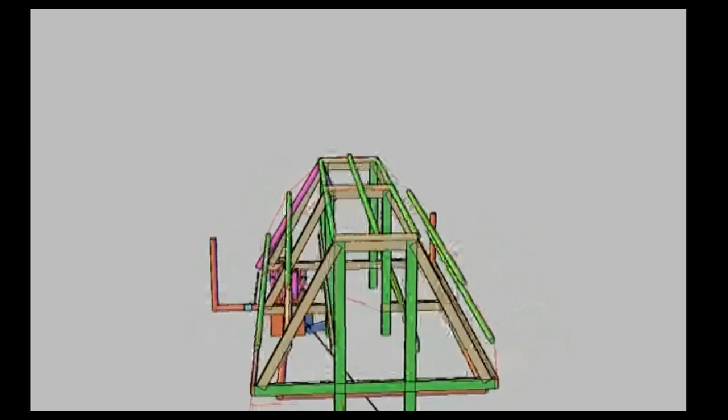The reason I doubled it right off the bat was because I got reading up on greenhouses, and everybody said if you think you need a greenhouse of a certain size, double that. And they were right. I would have quadrupled it or even more had I known how fast things were going to grow and how much more space I would actually want.

But I should mention, I did build this greenhouse strictly as a test greenhouse. I did not expect this to last more than a couple of years. It's lasted 6 so far, which is awesome. And the frame is still pretty solid. It does need to be re-plasticked at some point. We're overdue for changing the plastic.

I do have some glass. I thought about putting glass in it. I don't know. I don't own the land here, so I don't want to get too involved or do something that upsets the landlords. So for now, it is what it is. It still works great, even despite how opaque and how little light is coming through the plastic at this point. It still does a pretty good job.

So like I said, I was going to do a video on this, but the more I got thinking about this and pondering greenhouses and all the logistics of it, I decided I'm going to do a series on greenhouses and setting up your own greenhouse, because I don't want to turn this into a 4-hour video. So I'm going to do this in a series. Today we'll start with some of the basics about greenhouses.

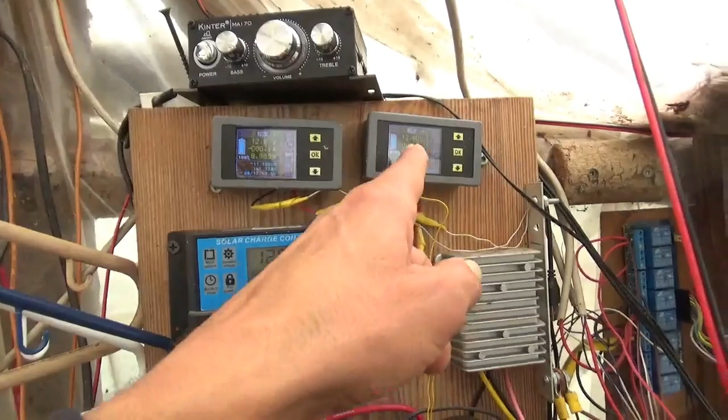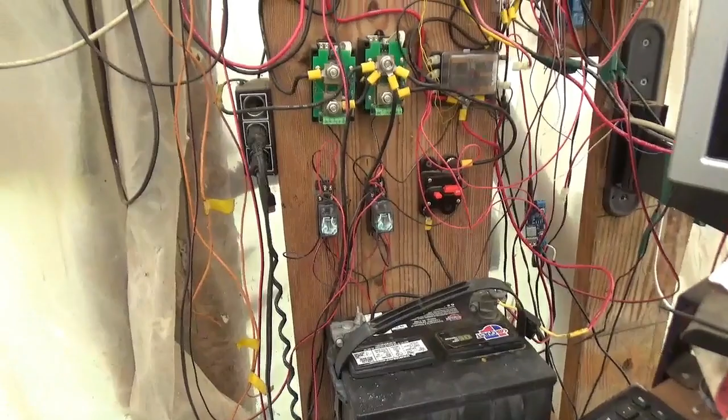I guess real quick I'll just show, even though it's a cloudy day, all the power for the Raspberry Pi is coming from the solar panel, and we're actually charging that battery bank. We were down at 12.2 volts last night, actually 12.15 when I walked out of here, and now we're sitting back at 12.6. So that's nice to see this battery's taking a charge, and it's nice to be back on the solar power.

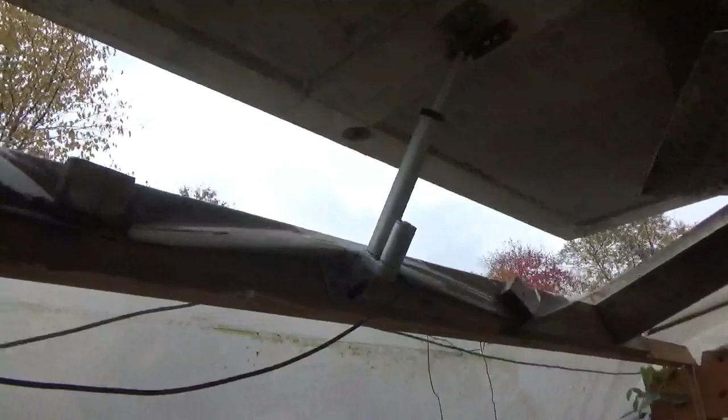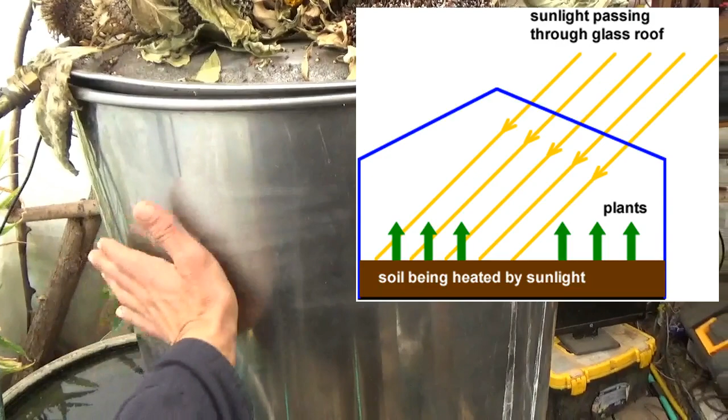So I don't have the sensors fixed yet on the Raspberry Pi, but we do have the DC power system back, and so the vents open and close now. I just sent the command to open these vents because it's pretty warm in here. It's a cloudy day, but you'd be surprised how much heat you can actually collect even on a cloudy day, especially when you accumulate that in combination with all the thermal mass that you've created overnight. This pot is probably 120 degrees, maybe 125. It's pretty warm. So that brings me to my next point.

Greenhouses effectively are trying to mimic a natural environment, and in trying to mimic that natural environment, you're trying to provide plant comfort. That's really the end goal for a greenhouse, is to provide comfort for plants. And I think that's a perspective that you should adopt for anything you're growing. And it's a huge part of regenerative agriculture, providing adequate mineral nutrition and biology and comfort for plants. When you can put a plant in its optimal environment, it can express its genetics at an optimal rate, and that will give you optimal yield.

So what we're trying to do in a greenhouse is mimic an environment that is where the plants that we're growing come from. So in the example of ginger, this is all ginger here. Ginger is a tropical plant. There are non-tropical versions of ginger, but this is a tropical version of ginger, and so it grows in the under canopy of rainforest in its natural environment. So what we're trying to mimic is the under canopy of rainforest. So that said, in order to do that, you'd want high humidity, you'd want warm temperatures, and you'd want good soil moisture and good humic matter.

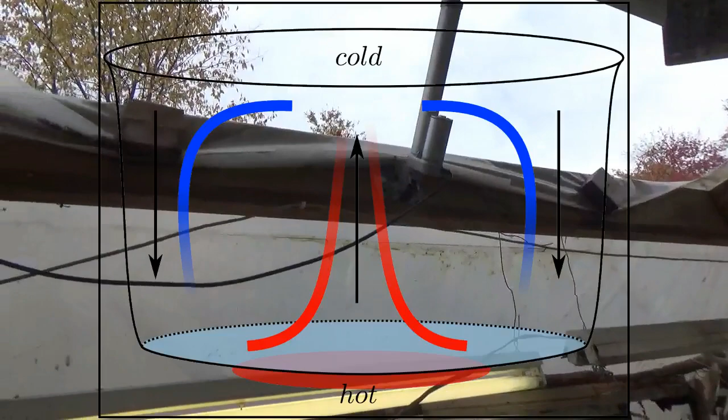You can use that to your advantage, or you can work against it. I like to use natural systems to my advantage, and so I take full advantage of convection. That's that process, convection, and so I let the heat out with that. And then when we get above 50, if it's still too hot in here and the temperature reaches 85 or 90, I forget what the set point is, that's when we open the secondary vent and start really piping air through here. Now I don't need a fan to move air through here.

These vents, you'll notice how big the space is for these vents. Each of these vents I think is 3 foot by 7 foot, so 21 square foot of ventilation space. The greenhouse floor space in here is 288 square feet as a comparison. So you can see what that percentage is, and that's very critical. You need to be able to exchange a tremendous amount of air very quickly when you need to exchange air. So let's see, go on to the next point.

Okay, so we talked about venting, we talked about plastic type. One of the other advantages to the greenhouse plastic is it has that infrared coating that's supposed to help reduce dew and condensation. So this is another thing that you have to manage in a greenhouse environment, is humidity. And it's really, really important, again, for plant comfort and health. Ideally, humidity levels would be in the 50 to 60% range, could be as high as 70%.

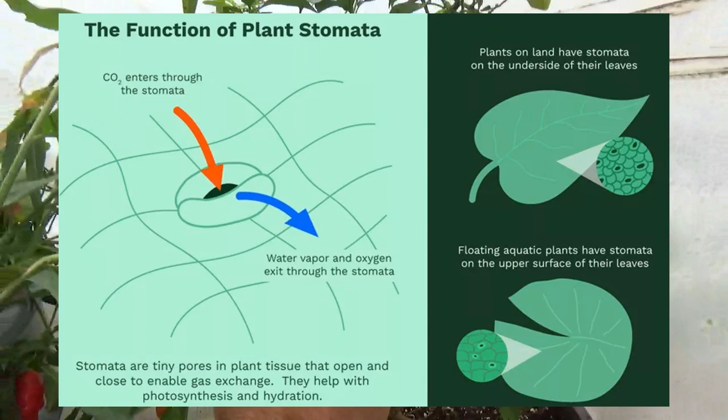If it gets much below or much above that, plants have a really hard time opening their stomata and doing transpiration. And that's a huge part of a plant's growth. It needs to be able to pull moisture up from the soil into the stem, through the leaf, photosynthesize, and release that excess moisture through the stomata. For those who don't know, the stomata are these little holes in each plant leaf, and if you look at these on a microscopic level, they have little breathing holes, and they can open and close those, and they'll do that based on the environment that's around them.

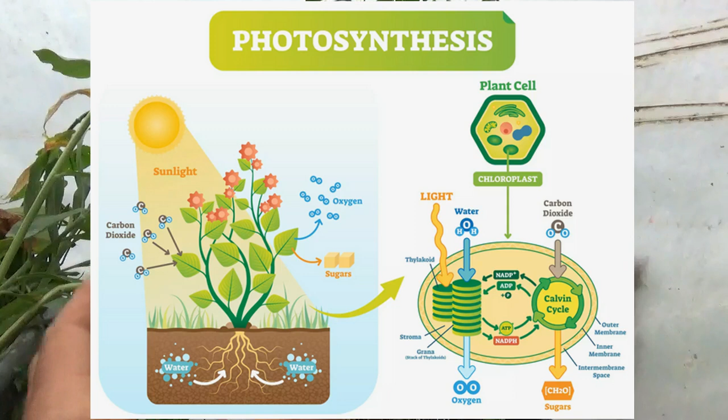If it's too dry, they'll close their stomata and try to prevent moisture loss, and if it's too wet, they won't be able to evaporate moisture out. And so that will slow the photosynthetic process down, slow plant growth down, and if you're slowing photosynthesis and plant growth down, you're slowing productivity down. So that's another very important thing to manage.

So in here, in the wintertime, with the wood stove running as a heat source, it gets very dry in here very quickly overnight. In the daytime when the sun comes out, it gets dry in here also because of that. So what I do is I come in here in the winter, I will water the plants that I'm watering. Sometimes I'll even spray the plants down for extra moisture, and I'll actually go through and water this floor down pretty extensively to raise humidity in here and keep it up.

If I don't do that, humidity will typically fall below 30%. I've seen it down at 20, I've seen it down at 15% and even 10% on really cold winter nights when the stove is running hard. So managing humidity is tricky.

Now in the daytime, if you've done that, or if you have a lot of growing plants in here and that sun comes out, they start growing, they start releasing all this moisture, the sun strikes the floor and the plants, and you'll see humidity spike way high in the daytime. And again, that's where that ventilation becomes very critical. Winter time I don't see that so much, but spring and fall I do.

So that's another factor. Now, if you're growing tropical plants that are used to long light cycles or are from the equatorial region of the planet, you're going to need to use supplemental lighting. And we'll get into supplemental lighting. That's a whole separate topic that I want to cover because it may seem like a simple topic, but it is not a simple topic at all.

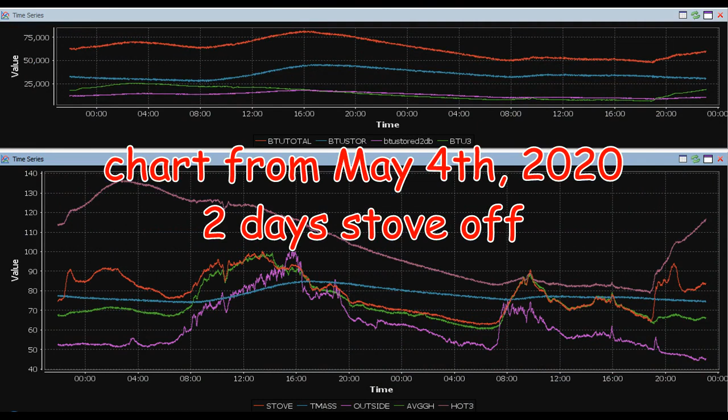Let me see. So we covered all that. One thing that you'll almost certainly want is some sort of a data logging system or some sort of system for monitoring temperatures in the greenhouse. You can get all sorts of remote control thermometers and wireless weather sensors and that kind of stuff, but I find that they're ultimately lacking and unreliable, and that's part of why I started building the greenhouse Raspberry Pi controller.

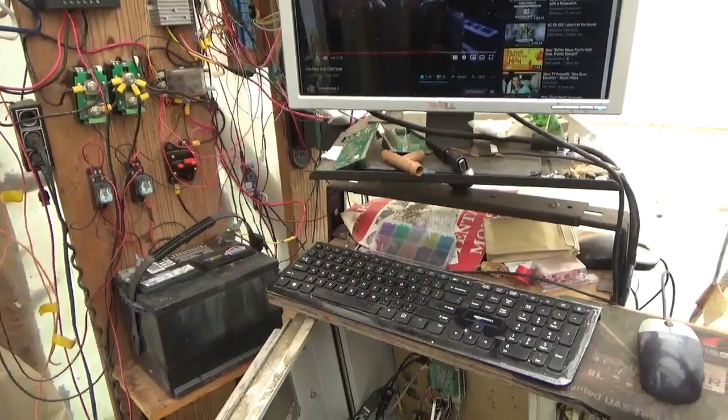You can buy greenhouse controller systems. They are incredibly expensive. If you check out, say, Neversink Farm on YouTube, his greenhouse controllers are commercial grade greenhouse controllers. They run about $3,000 for the controller, and every time you add a sensor, that's another $200 or $300. So unless you have a gigantic budget, count on building your own stuff or count on other ways to manage and monitor.

Now, my greenhouse is about 300 feet from where I live, so for me it's quite a walk to come out here and check on things. Not that that's a huge distance, but in the snow and the cold, when there's a 30-mile-an-hour wind out there, it's a long ways to walk. So it's really handy to have this system set up here.

This comes back through a 1 gigabit network connection right back to my console. It logs all the data to a database on here, and I chart that. And I've done other videos on that. Maybe I'll share a link to that too. But that's really handy for keeping an eye on things.

And if the stove doesn't light up properly because a piece of wood is slow to light, or if a door gets yanked open or something happens, you can see that temperature change reflected on the chart right away. There's a problem and you can go mitigate it right away. It's really important.

Alright, so this is a basic introduction to this series. What I'm going to do is post this video up. I'll let the people who are inquiring about the greenhouse stuff check it out and ask further questions, and then what I'll do is I'll write those questions down and I'll go into those pieces piece by piece. This will be a series. I also have lots more to talk about and discuss and explain, but I just wanted to get sort of an introductory starting video to this series to kind of help you better understand greenhouse environmental management.